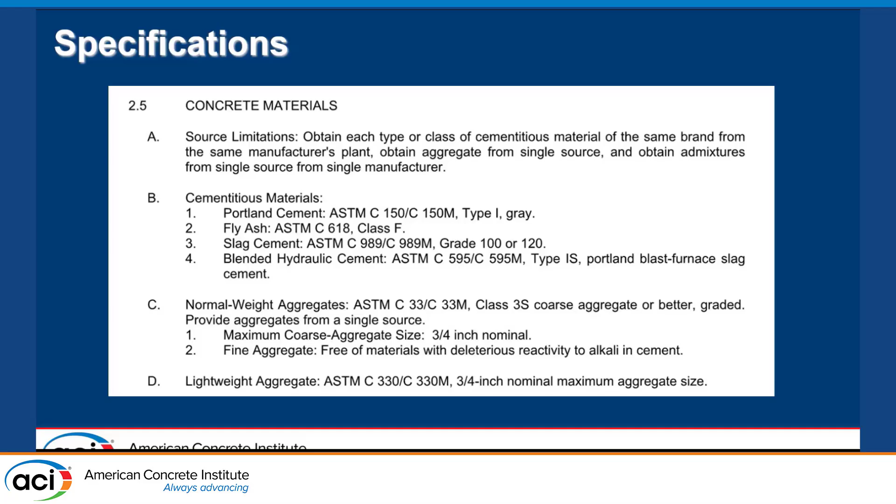But the big force with this is that everything we're seeing, the set times and all that duration, is coming off of engineers not understanding what we're putting down as a product. I'll talk more about that when we go into the test pours. This is a big problem for us.

Unfortunately, this is yours, I'm sorry. But the issue date, the manufacturer date, the Blaine, and percent content - as you can see on this was issued to me on May of 2023, it's April of '23. Now then, that's not April 2nd, that's not April 5th, that's April, the month of April. So that 1L, I think that's a 10 up there, is actually for a blend of every sample that they've taken for the entire month.

And I get the other side of that, the 457s, we've talked about that. Understand what I do for a living, I do get in the field. Usually I'm not this good looking. And with my guys, what I explain to them is this.

It's hydration is what y'all call it, what we call it soaking in. And so take a handful of sand in one hand and baby powder in the other, and you shove it down in a bucket of water and you pull both out. Sand's sopping wet, baby powder's dry in the middle. That's how that blend affects our finishers in the field.

That delayed time to set, we're going to get into why that's such a critical issue for us, it's super critical. The second part of this is that 5 to 15%. As that runs through, what that means is that's acceptable to come to us, and at some point that average ends at a 10L.

What we see in variance, I know there's been a lot of studies about how we're getting variance in the field. After Boston, I went home to a lot of my suppliers and encouraged them to start taking pint jars of every pour. We have been financially impacted by several high limestone content pours. So with that, we're able to go back and say we had high limestone, or evaluate back through the mix designs.

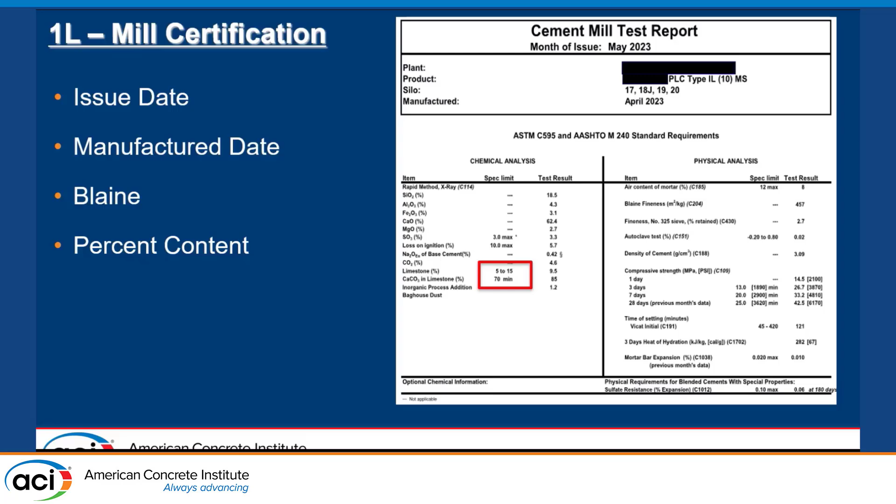I do rely heavily on the NRMCA sheet. I think it's a good one. I know that Strategies has got a great one, and we've paired up in the past on a couple of jobs. That's wonderful. I've read through it. So talk to Kyle. That's a great sheet.

So the test pours. The reason why the test pour is so critical is because we feel like a lot of times we're going against the stream. We see a 1-2 test pour, or we have to see a 1-2 spec. So everything that I'm now doing is on the 1L. So with that is shrinkage, is curling, is every constituent of that to include their design. You know, when the floor cracks, I get the call. Then I call Mike. But you see what I'm saying? So every part of that design is super critical.

Notice we're starting as deep as the subgrade and sub-base materials. If we're putting poly underneath it, that friction's big to that design. We have to test it. And you've given me a spec that says 1-2, and I'm using 1L, and it reacts differently to everything on that sheet. Our densifiers, our curing methods, the strike to grade method, how we're vibrating it, how we're rodding it, if I'm using a large laser screed, the reinforcement, the type of reinforcement. Does it require reinforcement? Everything is super critical in the design. So not only do you do the test pours, they have to be exactly the way we're doing it.

Another thing we need to consider on these test designs, and I know that Kyle hit on this earlier, is that when I do them, I try to rip that slab apart. And so on that shrinkage with this 1L and that hydration rate, I would rather see a 20 by 200 than a 5 by 5 or 10 by 10. And the reason why is because I can truly measure what's going on.

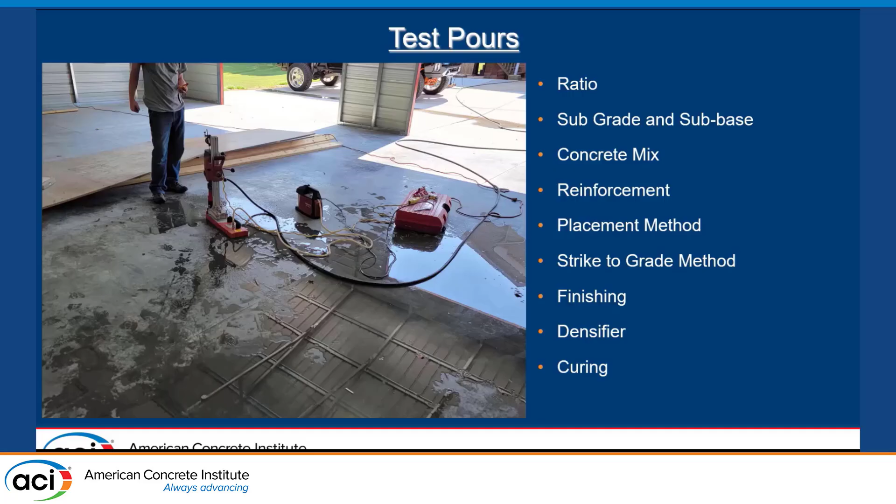Next. Keep all that in mind. Keep everything y'all have heard for the last 2 hours in mind as we run through these, okay? There are kind of some nasty things, and I promise we'll get through them though.

All right. So I got called in on a job site, pre-con meeting, having a lot of them actually, and this was with the polisher. Usually LITHKO does a lot of structural concrete. We don't do a lot of architectural concrete. So when I get a spec, my guys immediately call me, hey, we need you to go talk to this guy. What went through, and he brought this up, was weak finishes.

Ghosting is what we call it, raveling in the saw cuts, all kinds of real things. And everything I kept hearing out of his mouth was finisher, finisher, finisher, right? We're throwing water on it. We're not finishing it tight. We're not hard troweling it steel in. And in all actuality, I started giving that a lot of thought, and I walked out of that meeting with a lot of insight and came back to it.

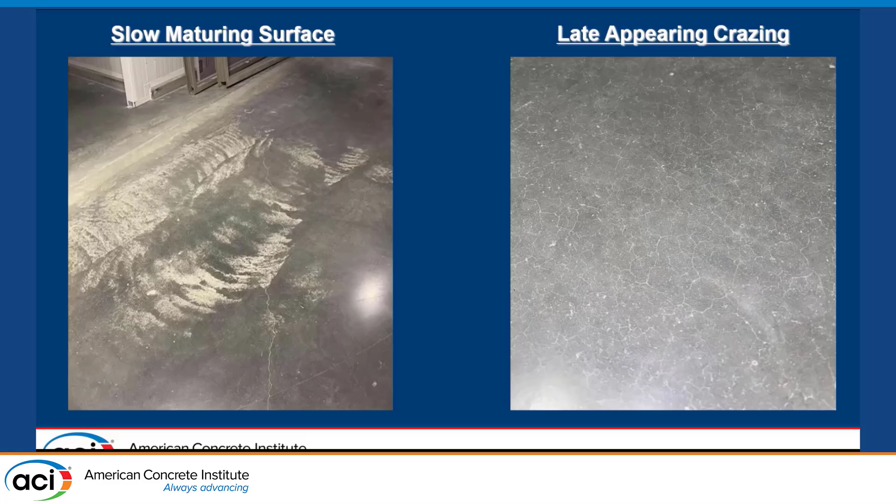Next, we're still seeing a lot of crazing, even with densification. It seems like they're okay, and as the days and weeks go on, we start really noticing. This is about 6 weeks later into this project. Whether or not it's the 1L or the reaction with our densifiers or whatever it is, they're late appearing. This is pretty small, guys. I'd say those are half a dime size, but it's a whole floor like a shattered piece of glass.

All right, anybody need a... Oof.

So, as we go through with y'all's designs and we start working through the processes, everybody in this room is trying to get to the 2050 carbon, and y'all are doing things to help us out and to keep this as money efficient as we can and get good results. We're seeing these structural fractures in these slabs. And as we evaluate this one, you can see the saw cut's pretty clean. It's not raveled out. But what happened on this one is this.

We get these design modifications. One of the things that was attempted on this one: in my area, we use almost exclusively river sand. And to stretch out the dollars in the budget, this was about a 30% replacement with man sand. We already know, back to specifications and the discussions, that the 1L is thirsty, and now I've got an aggregate that needs more water in it. They didn't adjust the mix design.

It ended up soaking it up, and it absorbed all the water and hydration out of it, and we ended up with structural fractures. Those appeared early, and our finishers and our pans, of course, finished it off. We didn't know about it, and then after it set and had enough cure on it, they showed their heads at a later time. Back to the 308 plug.

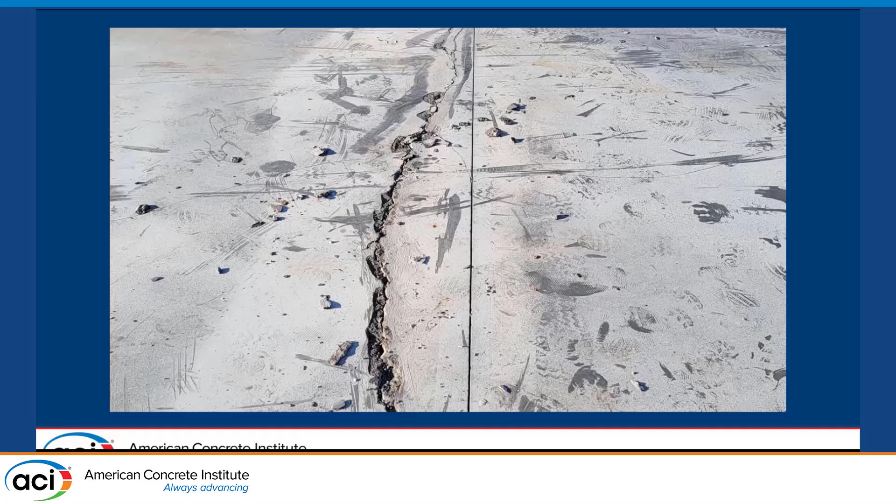From the very beginning, guys, you have to control the moisture. Evaporation retarders, as we're going through with the mixes or at the finishing processes, finishing aids, we'll get into some of that. There's some good people in this room that will answer your questions later, but cure, keep the water in, keep the water in, keep the water in.

Let me stop right here. For y'all that know, that's Chris Toll. I haven't been with ACI a long time, but the one thing I can say about ACI is every one of these situations and problems, I've called somebody from ACI. 100% of the connection. So if you're new here, meet and greet, find new people, because this is where I've learned the most.

So I get a call about this. We have a quite significant amount of ag pop and honeycomb, pretty excessive.

Can you come look at it? So, of course, I get on the road. So the first thing we did, I called a buddy of mine, and he went through and basically worked the mix design. We put a mid-range or mid-grade ag in it. We pulled the high range. This team was using a high-range water reducer.

It segregates as it gets bounced through these horizontal forms and rebar. That's super critical to be shoving down in that wall and dropping it. ACI says about 3 feet. We'd like to see that stay. The second thing is the vibrations, and we're going to get into that in a second.

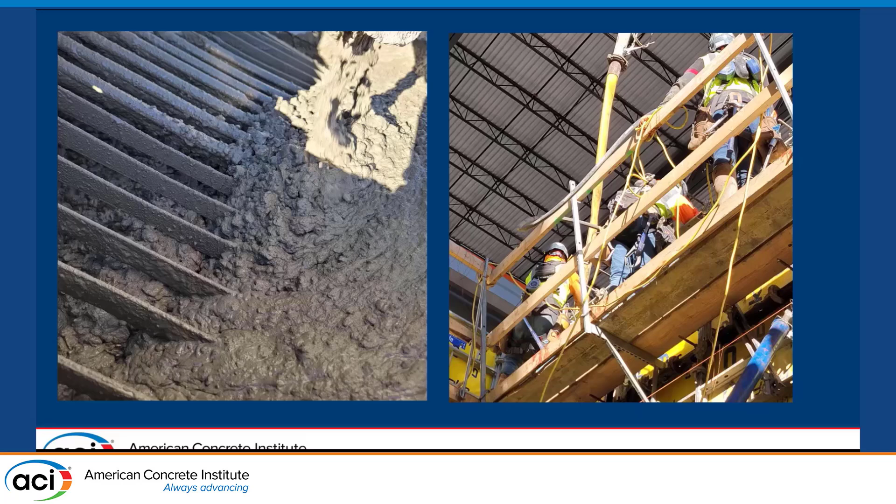We shove those vibrators down that wall, and if we're walking them up, that free water, because the concrete hasn't hydrated completely and soaked it up, comes down the walls, and it forms into water columns, and it finds any hole that it can leak out. So it's either at the bottom wall.

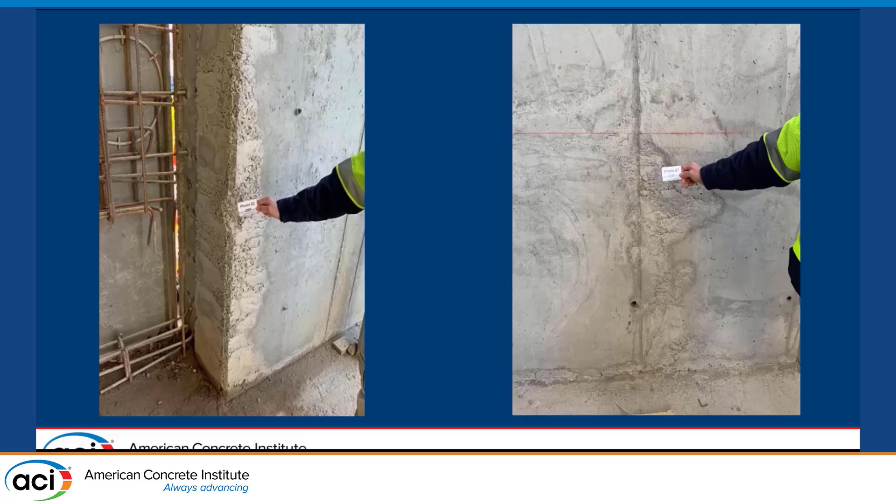For y'all that don't know, that's a form line in there, so it's leaking out of that crack. Those are corners on the side and the crack there. Telltale sign. Oh gosh, let me see if I can point. See that halo? And that white, that's all water. So that hydration rate is very critical to us when we do these heavy, big walls. Slow down your VBMs on these.

So what did we do on the verticals? And you can see here, once again, where the water settles at the bottom, washes out from underneath the form. Add that VMA in there. It moves the concrete. The guys get a good feel for it. It drops it. It kind of keeps it together as it drops through the rebar and the forms.

Insist on a mid-range ag, like a 57s, and then add in either a 9 or a 7 blend at the bottom of it, using that wall snake. Don't drop it. Get it down there as close to the pour as we can and pull it up. About 4-foot lifts is what we're doing.

The second is drop down that VBM between 6,000 and 8,000. Internal, not wall. It's just like running a mag across it for you guys in here, the finishers. As you run that across there, that water comes right to the top, and as that form sits there and vibrates, it just ponds and settles. And close all form holes and gaps.

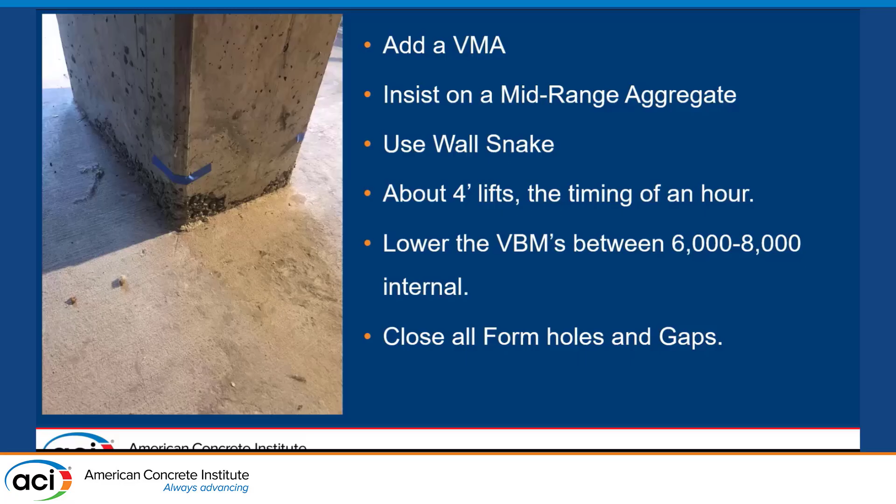All right, so moving into the next thing. Once again, everybody's trying to help. Early on with the structurals, we had a low break situation, I guess is the easiest way to say it. There's designers in the room. Where 1-2 would take off and just keep this nice, easy climb. We've done good pours with everybody probably in this room, where even on a 7-day we're at 100%, much less even second guessing a 75% break.

It was to the point, I used to make pretty good money selling it high early, and before 1-2 it wouldn't need a consideration because the mix designs, guys have done so well with them. So what's happening now, though, is it kind of takes off in a 24-hour period, and then it kind of lays over slightly. It continues to climb, but it's a slower climb, or slower rate.

And in the beginning, and a lot of the producers know this, we were fighting it to get it to full strength. So what ended up happening, we were getting a lot of design influence from the engineers, and then they were over designing the bars. They were basically offsetting the strength gain with rebar. Now let's go back to the 1-2 and understanding really what 1L is.

So to get the shrinkage and everything else that's required in it, the large ag is required in a lot of our projects. What happens, though, is that we end up with significantly closer bars, and that's a design spec. And then I can't get 1.5 inch rock in a 3/4 inch hole. The second thing that happens, and we're building into some impact, so everybody keep adding,

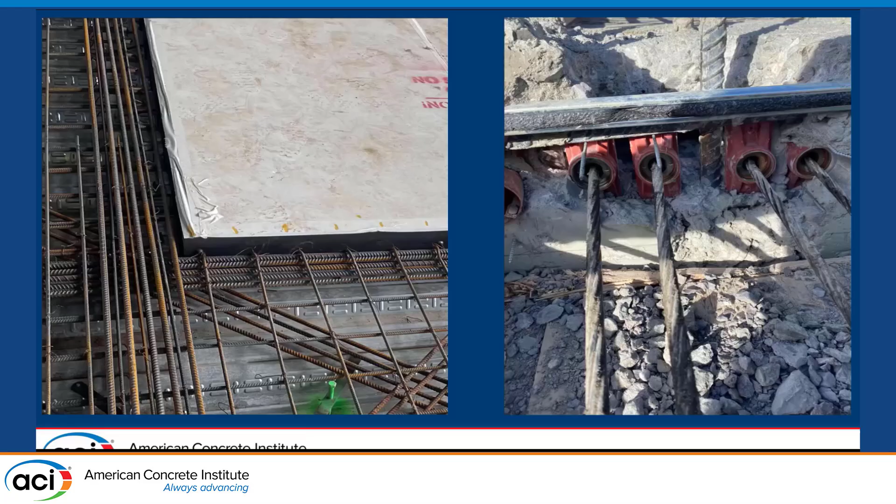So, similar project. So we're having testing issues. A lot of times timing's everything for a general contractor in the field. With the hydration rates being slow, the breaks being slow, we really depend on the mud being correct. It's part of our pre-construction phases we go through, and we give design criteria to our suppliers. And the biggest one for us is strength. We need 75% strength. With that being what it is, the field testing and everything with that kind of got out of whack.

We're seeing specs that don't require unit weight. And the next thing is the consolidation of the cylinders. A lot of times they're using the pencil rod cylinders in there, and we're ending up with smaller, lower breaks. So they went to maturity meters with the 5 tests and the 5 mixes. I'm sure everybody's familiar with that. The problem with that, go back to the 1L, is if they tested a 1L that was an 8L, and this mud comes out at a 15L, those maturity meters don't tell us what to do.

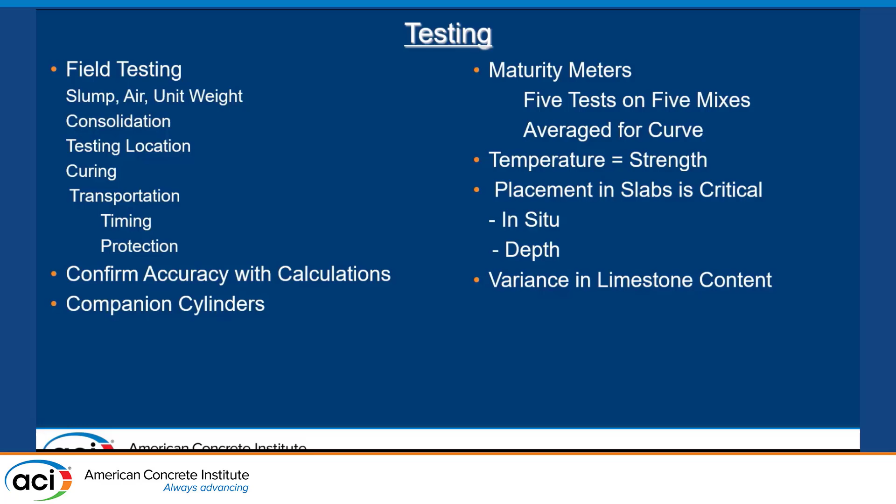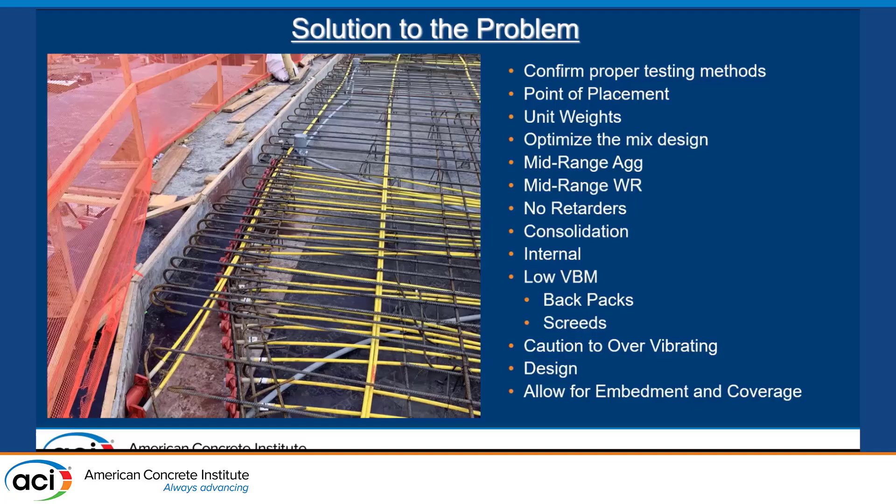So the resolution was to spread out the cables, redesign the engineering on the rebar spacing. We lowered the VBMs on it. Caution over the over-vibrating, added the mid-range ag so we could get complete encompassing of the cables and the like, and no retarders. We talked about that. That's a big thing that actually I can't compliment IMI enough. We've really hammered the no retarders in the last couple of years.

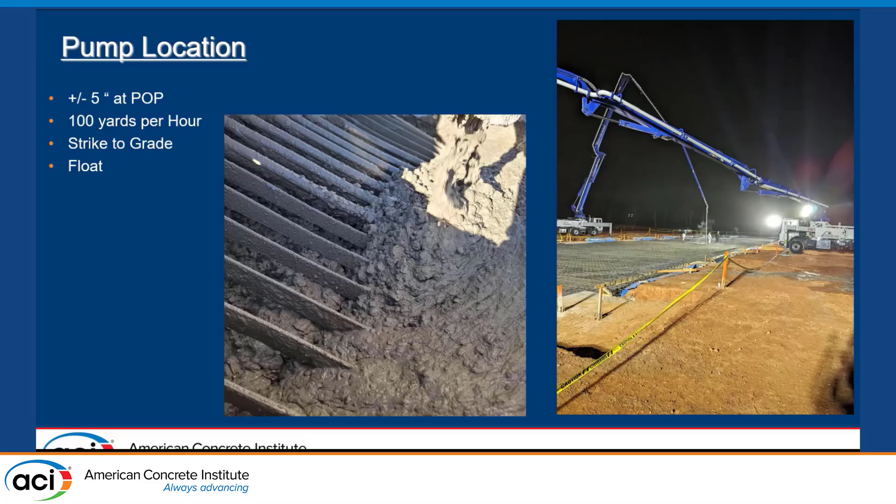So quickly, pump location. This is our flat work. Pump location and quickly to the ground. We'd like to go at the tip. Make sure your testing's at the tip of the pump and not at the truck. We like about a 5 at the truck, or at the tip of the hose, 100 yards an hour. It's very critical with hydration to keep up that pace. We need that 100 an hour. Strike it to grade, float it off. And then on a lot of our ride-on screeds, we've added where we can put a vapor retarder down as we go.

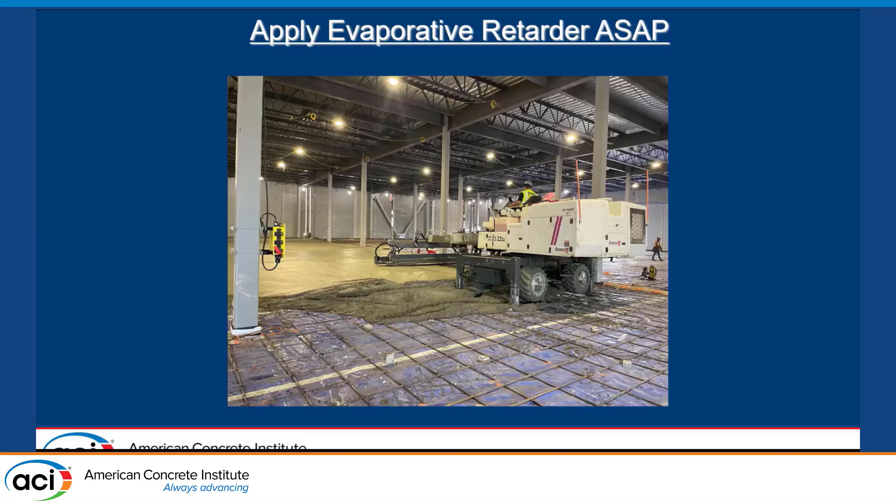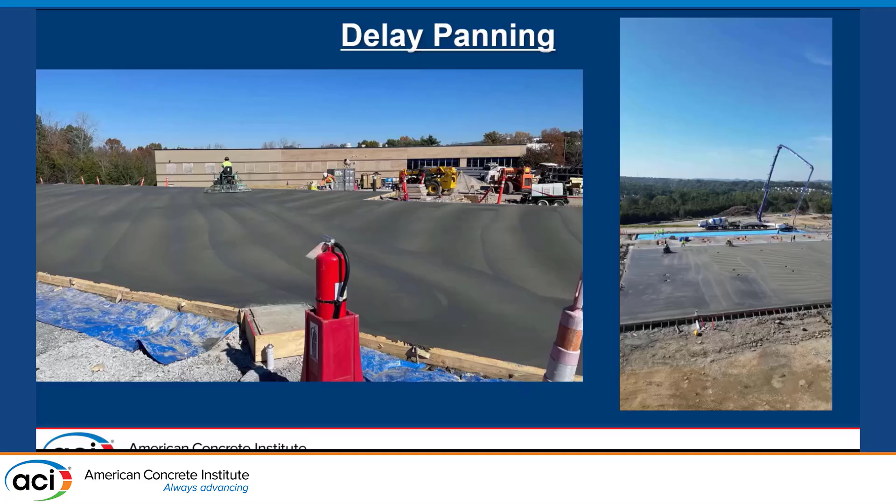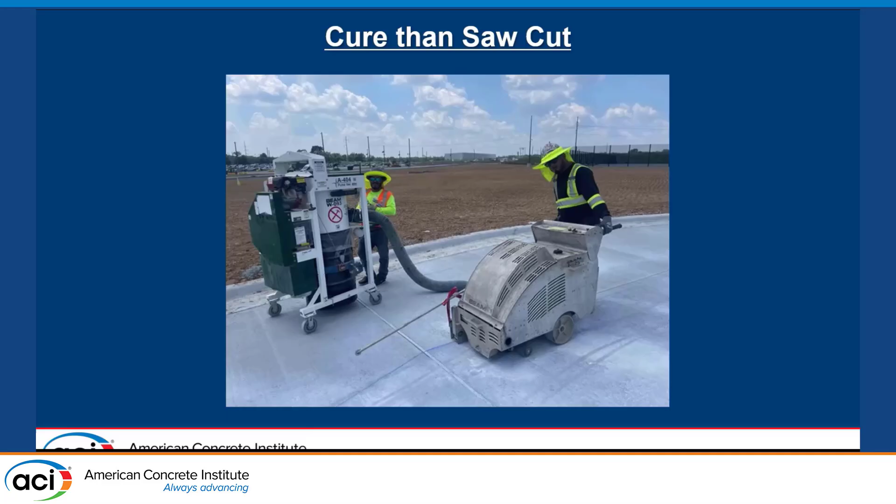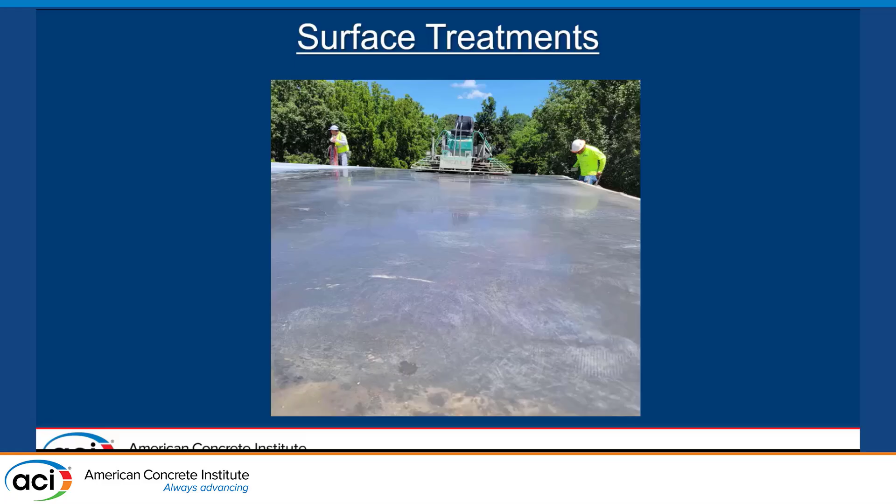Wait, delay panning. Wait. Don't trap the water, don't flood it in. It's going to take you about another hour and a half on most slabs, just so you know. Cure, then saw cut; don't saw cut, then cure. We're trying to do everything we can to keep as much water in that concrete throughout the entire process. We have had a lot of good faith and a lot of good tests and a lot of good hard work with the trowel densifiers. There's a lot of people in this room that do that. Talk to them. I'm not here to sell products, but we have seen significant reduction in crazing with the surface treatments.

So quickly, we're in this together, as everybody keeps saying. Do those test pours. Make sure they are there. They have to prove what we've got in place is what the engineers want us to have. With just having a 1-2 and not the 1L specs out there, super critical. Get the word out. I can't be by myself. I'm just that concrete guy that's going in and telling an engineer that he's wrong. But in all actuality, I fight it every day on water cement ratios and everything else, and it's because they're not keeping up. I need y'all's help.

Evaluate your individual craft for practice, whether you're a tester, an engineer, concrete finisher, pump guys, everybody. Look at it. It's the little things. Specifications, Blaine and limestone, super critical to us. Optimizing that mix design with those smaller ags and hydration stabilizers. And then finishing techniques, like we said, how we're putting it down is critical to the mix design. Work with your installers. Hydration rate, consolidation of the equipment, keep those VPMs down. The timeline is lengthened, we know it. Additional products, densifiers, and of course expansive cements. We have done good products with that. And Kyle and those guys have covered that already.